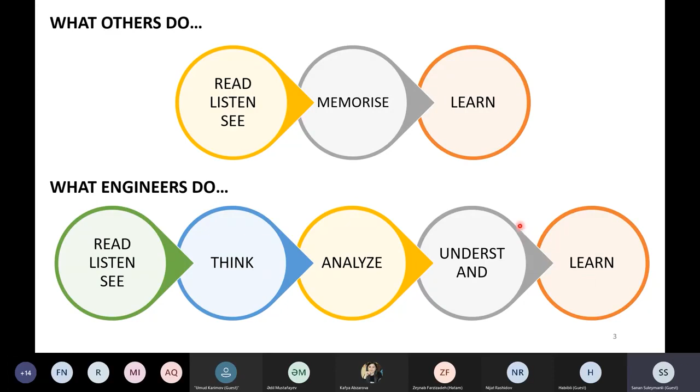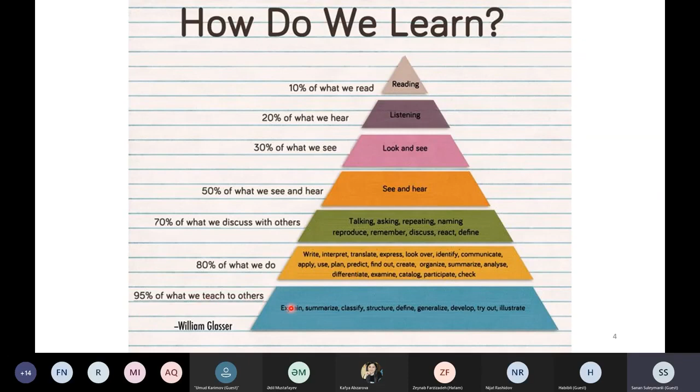How do we reproduce? We take notes during the classes, and then we read our notes again and again. That's one way. Another way can be doing the homework assignments, which we do at the universities. And the most effective way of reproducing is teaching. You share your knowledge, you teach others, and this way you learn more than the ones you teach. I will show you also a pyramid that shows how we learn, and at the end you can see that we learn 95% of what we teach to others. If you share your knowledge, you learn more and more.

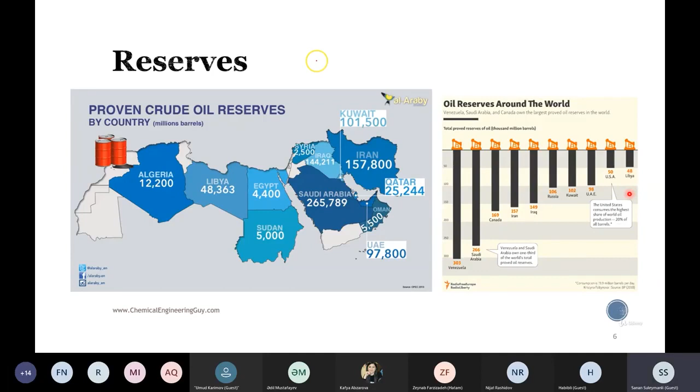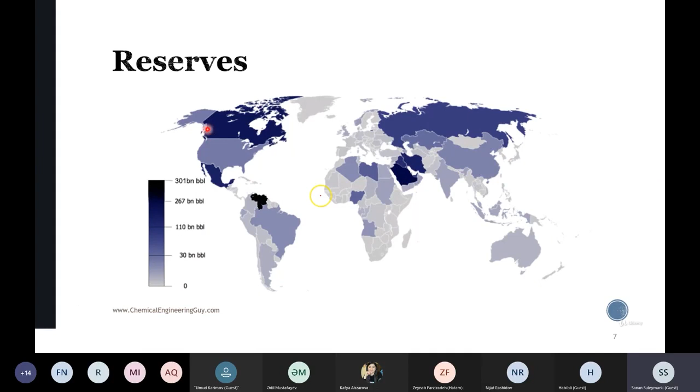Oil reserves. Why do we have oil refineries? Because we have a lot of oil reserves. Here you can see that the most oil reserves can be found in Venezuela, Saudi Arabia, Canada, etc. If we have so many oil reserves, then we should also have many oil refineries. This shows the map view of the oil reserves. Again you can see the most oil reserves are in Venezuela, Saudi Arabia, Iran, Canada, etc.

This is the statistics from the BP Statistical Review of World Energy 2018. Comparing the years 1997, 2007, and 2017, we can see a sharp increase in proved reserves, from 1,162,000 million barrels in 1997 to nearly 1,700,000 million barrels in 2017.

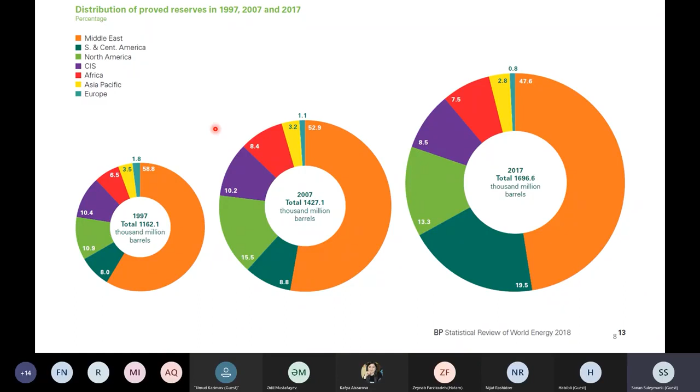Then what's crude oil? Crude oil is a multi-component mixture consisting of more than 108 compounds. In the next slide we will see that crude oil is mainly composed of hydrocarbons and also other impurities like water. That's why we have to refine oil, because we cannot use crude oil effectively without refining.

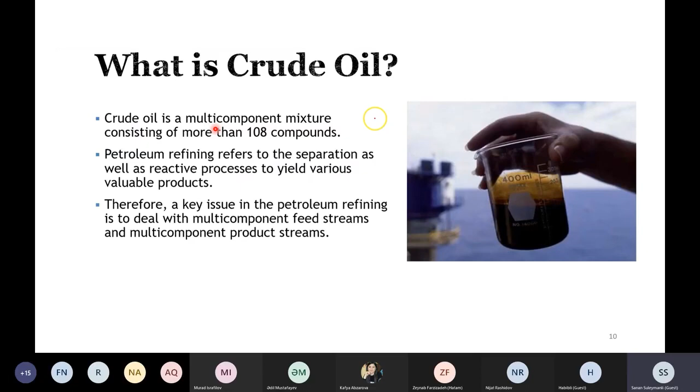You can ask, what is refining? Refining is just changing the shape or bringing the feedstock to useful products. It's not only oil that is refined - milk is also refined, and we produce different products. Nuts are refined too. So different feedstocks can be refined, but today we will talk about crude oil refining. Petroleum refining refers to the separation as well as the reactive processes to yield various valuable products.

Before starting the refining, we can classify our oil. Here you can see we have light sweet to heavy sour oil. What is light? Light means low density oil. API is from 35 to 60. You can find the specific gravity using this formula, which means that once API increases, specific gravity decreases. So higher API means lower density of crude oil, that's why it is considered light oil.

For your information, the API of the crude oil we are refining right now at Heydar Aliyev Oil Refinery is around 30. 30 API means we have medium density, and that corresponds to around 0.875 specific gravity. What about sweet and sour?

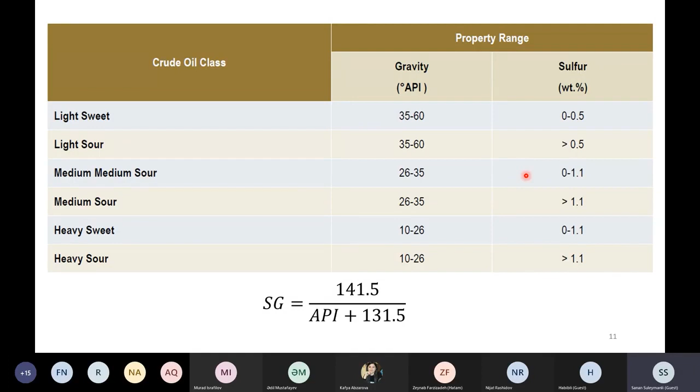Sweet and sour represent the sulfur content of crude oil. From 0 to 0.5 weight% sulfur, it is sweet. If you have more than 0.5 weight% sulfur in the crude oil, that is sour. Okay, what does it tell us? Why do we need to classify our oil as light and sweet?

Before answering the question, we can check the composition of crude oil. From 1 barrel, which is around 159 liters of crude oil, we can produce around 46% gasoline, 9% jet fuel, also called kerosene, and 26% diesel and other fuel. Of course, these numbers are not exact - they can be different for different types of crude oil, and also depend on what we want to produce more of.

If we want to produce less gasoline, then we design our process in such a way that this number will be lower but diesel will be higher, for instance. In fact, you can see that the light fuels, or useful fuels, are around 80% of crude oil. That is where the refiners earn the most money, that's why refiners try to produce as much gasoline, jet fuel, and diesel as possible in order to make money.

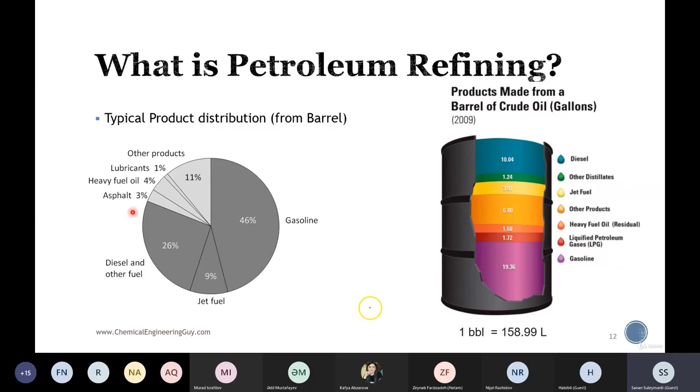Other products - lubricants, heavy fuel oil, asphalt, bitumen - are considered heavy products, which in fact have low contribution to profit.

This is the typical petroleum refining scheme. You can see that here we have crude oil and it enters the heater. After that, we have the distillation column and we produce the different products. Now, I will, so

What we said is that there are around 108 components in the crude oil, and the carbon number can start from C1 to C70 plus. That's why it's a mixture of really light components till heavy components. We have to separate it. We separate it, but our products are not pure substances either. Our products are also mixtures, but in a certain range.

So we have C1 and C2, which we call dry gas. We have C3 and C4, which we call LPG. So from C1 to C4, we have the gases. And then starting from C5, we have the liquid products. We have C5 to C10, it is naphtha. You can also call it the gasoline. Here we can see the light naphtha and heavy naphtha.

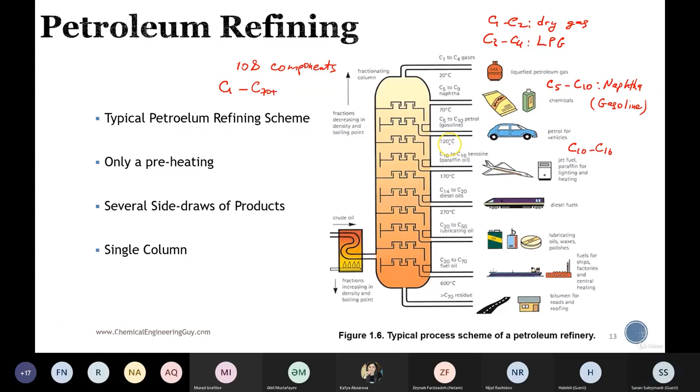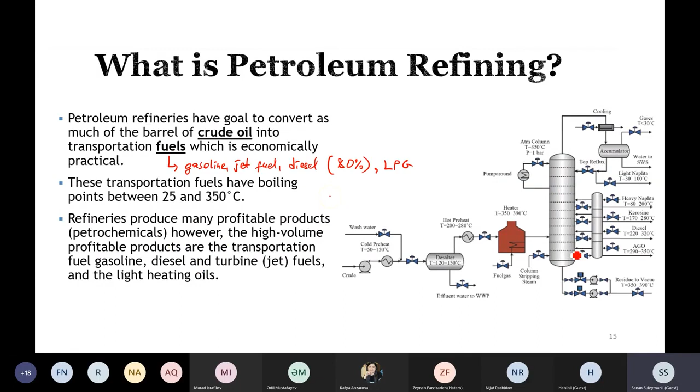We will talk about the boiling points of the products later. And as I said before, refiners produce many profitable products. The high volume profitable products are the transportation fuels. This is the crude distillation unit, which we will talk about later. And also,

if you remember, I asked the question why we should classify the crude types. So what we said, we had sweet and sour. We had light and heavy. This is what we learned about the crude types. So if you have a sweet and light crude, then we need a less complex refinery to refine this crude. However, if you have heavier and sour crude, it means that we need more complex.

Why? Because if it is sour, you have to clean that. To clean more sulfur, we need higher design capacities or more complex equipment, higher pressure, higher temperature, etc. So if we have the lighter crude, it means that we have more transportation fuels in the crude oil. But if you have heavier, then it means that we have less.

What we want to do is crack the heavier part of this crude into the lighter hydrocarbons, which are considered transportation fuels. And cracking units are more complex. And here what I explained is written. However, in the future, what we can expect is that we will run out of light crude as time passes, and we have to use heavier crude in 20, 30, or 40 years.

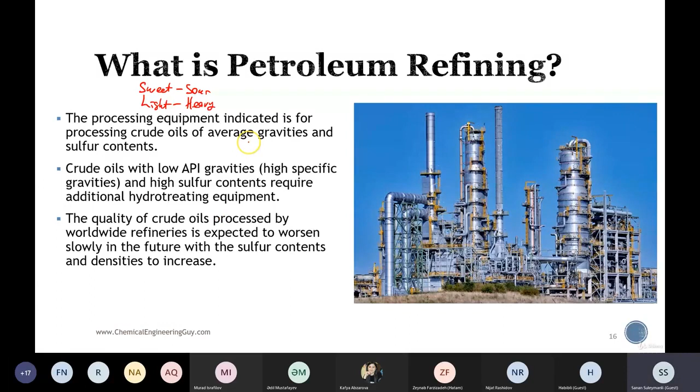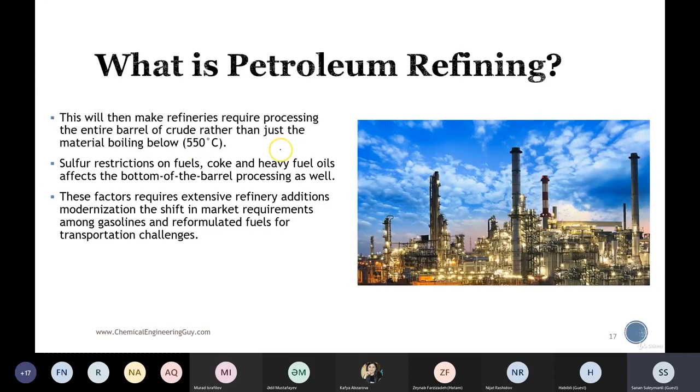In this case, this will make the refiners require processing the entire barrel of crude rather than just the material boiling below. So you will use higher temperatures, higher pressures, and it will cost more to refine the heavy crude.

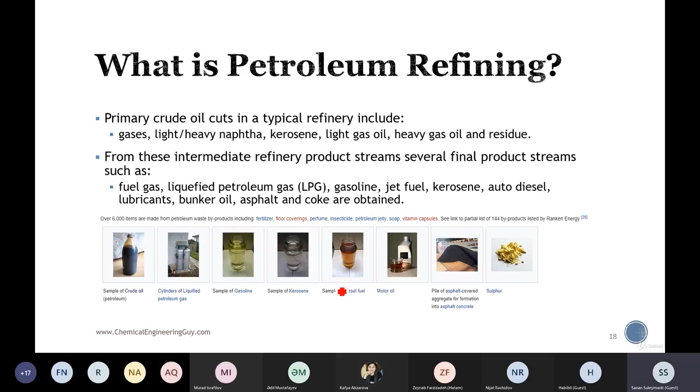These are the examples of the petroleum products, which we saw in the previous one. We have the gases, naphtha, kerosene, light gas oil, heavy gas oil. This is the diesel and residue. And you can find the photos of the different products. So gasoline, this is transparent. You have the kerosene, it's also transparent. The diesel fuel, you have the yellowish color, and as it becomes heavier, the color also becomes darker.

These are the different types of products which are obtained from crude, because the light fuels such as C3, C4, and light naphtha can be sent to the petrochemical complex. Here in Azerbaijan, we send the light naphtha to Azerkimya. In Azerkimya, they produce ethylene, and then they send ethylene to SOCAR Polymer. SOCAR Polymer produces the polypropylene, and from propylene, we can have, let's say, the bottle or other products.

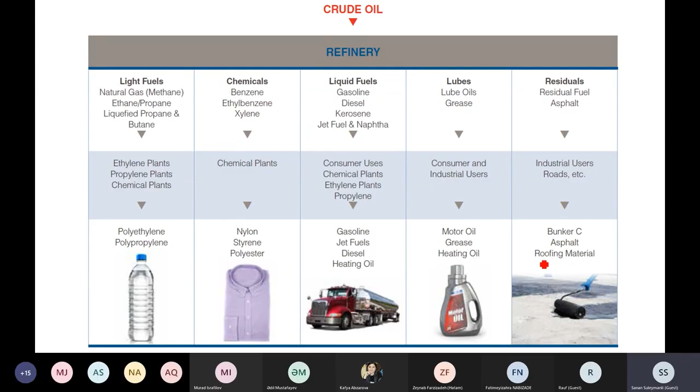So from chemicals, which are also produced from crude oil, we can have nylon, styrene, polyester. We have the liquid fuels, lubes, residuals. Residuals can be used for bunker C, asphalt, roofing material. So as you can see, there is no loss in crude. We use the lightest components from C1 to C2 as fuel gas, to the heaviest component as asphalt or roofing material. The process overview.

So as you can see, crude oil and gas is extracted from the well, and then of course it has a primary and secondary separation before it is sent to the refinery. Once it is sent to the refinery, it is desalted. We also have desalters in our refinery, and the refinery is our main scope. Today, we will talk about the processes there.

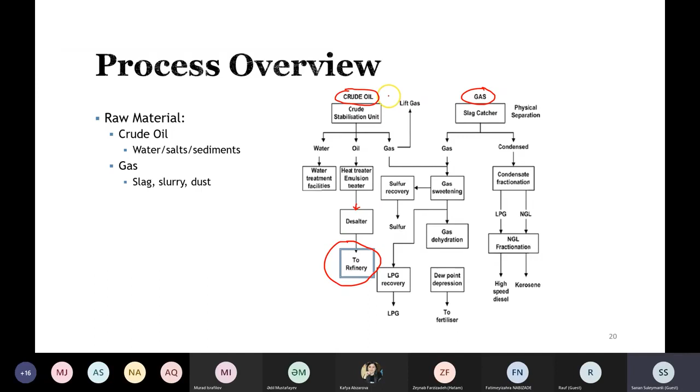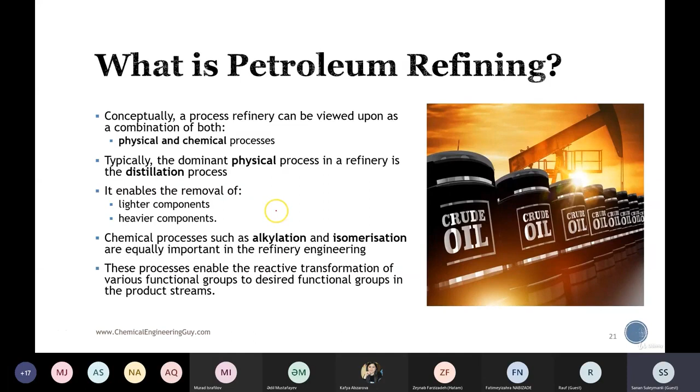And what is petroleum refining? In the refinery, there are both physical processes and chemical processes. The physical processes can be distillation, atmospheric distillation, vacuum distillation as a process unit. But of course, we have different types of separation or adsorption in each unit as a single unit operation. We have alkylation, isomerization, cracking, reforming. These can be the examples for the chemical processes.

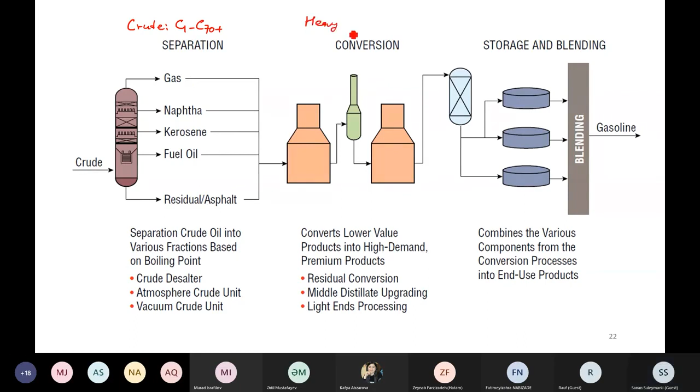We can separate the refinery processes into three parts. The first part is separation. Why separation? Because crude is a mixture of C1 to C70 plus, and we have to separate it first. Once we separate, we want to convert heavy products to light products. Why do we convert heavy products to light products? Because light products are transportation fuels, which help to make higher profit.

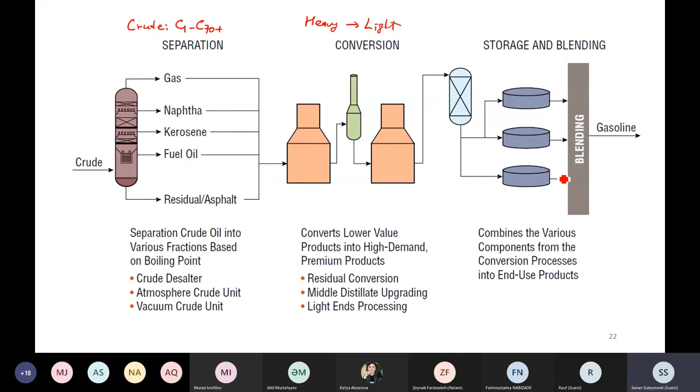And then, after all, we have the storage and blending. We blend the different streams as I showed in the block flow diagram for gasoline, and also we have some additives to diesel, jet fuel, etc. Is that all? No. Why? Because we also have treating. What is treating? Treating you can think of as cleaning. Cleaning from sulfur content, nitrogen content, also some oxygen, etc. Why? Because we have some standards, we have product specs for the transportation fuels and also other products.

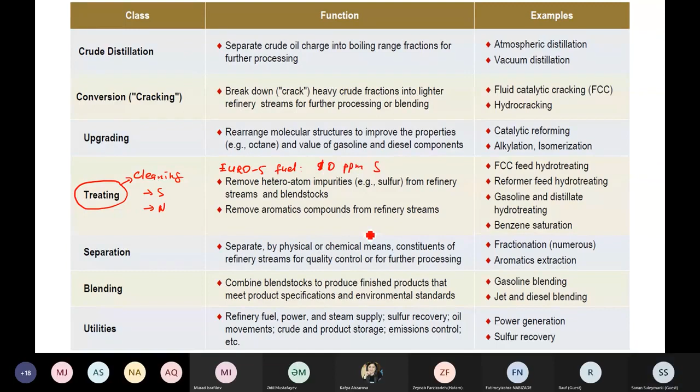For instance, if you want to produce the Euro 5 fuel, you have the 10 ppm sulfur limitation. So what was the sulfur content of crude oil? We said for sweet, it is 0.5 weight percent, which means that it is 5,000 ppm S content in the crude oil, but our final product, it can be diesel or gasoline, should have 10 ppm sulfur content. That's why we need to have the treating processes.

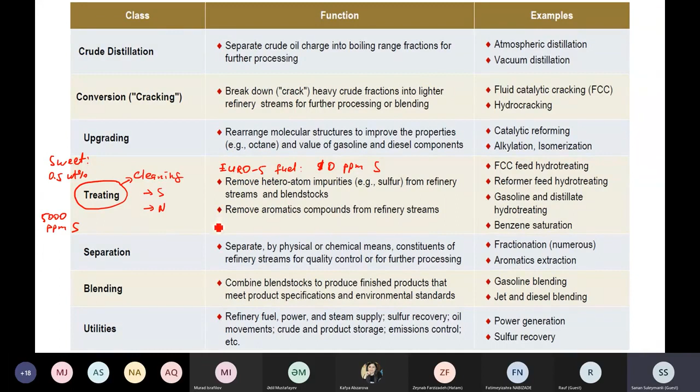And also the residues can poison the catalyst, because hydrotreating is a catalytic process. It can poison the catalyst in the short term. And it also has 5,000 ppm sulfur. All this makes having one single hydrotreater before the distillation unit impractical. That's why we first separate, then we have different processes for each type of product, as hydrotreaters. But whatever you have, you cannot sell your product without hydrotreating, with so high sulfur content.

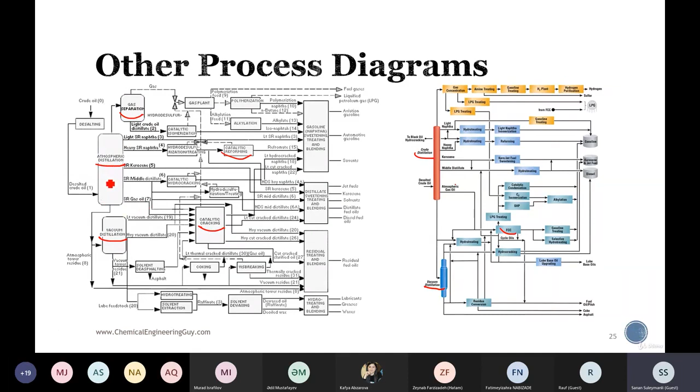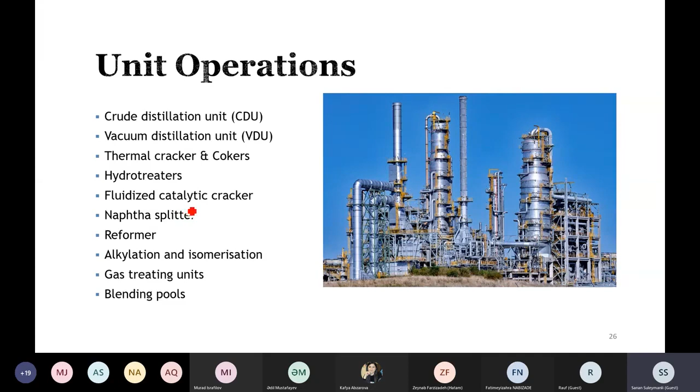Once again, what is a unit? Each single block is called a unit in the refinery. Unit operations. What you see in these block flow diagrams are these types of unit operations: the crude distillation unit, vacuum distillation unit, thermal crackers, where now delayed coker units are mostly used, hydrotreaters, catalytic cracking, naphtha splitter, etc. Now we are going to talk about these unit operations briefly.

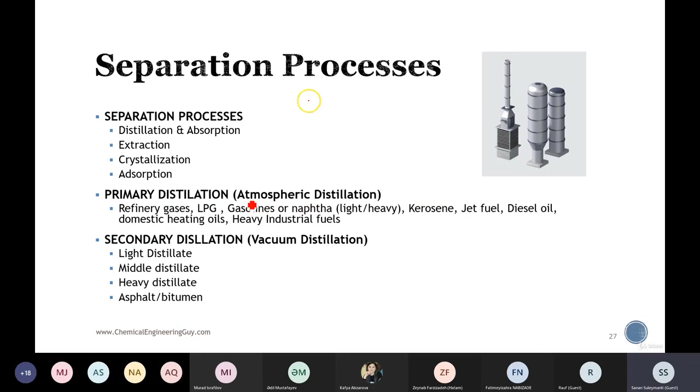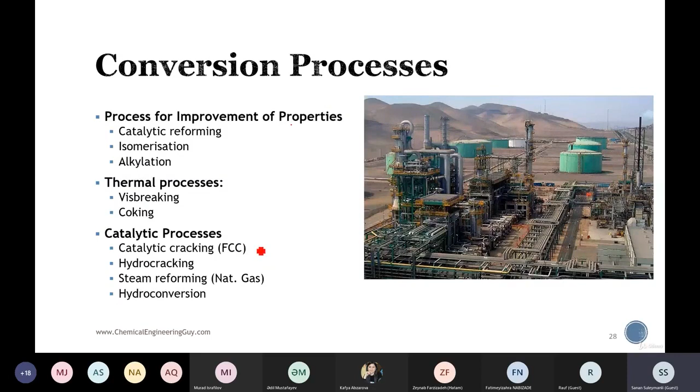Separation processes. As I said before, we can classify the processes in the refinery in a few steps. The first part is separation processes, which can be distillation, absorption, extraction, crystallization, adsorption. You can find these separation processes in each unit; each unit has a separate distillation column, a reboiler, etc. For primary distillation we use atmospheric distillation, because that is the first unit of the refinery, and we also have a secondary distillation, vacuum distillation. Conversion processes are catalytic reforming, isomerization, alkylation, hydrocracking, catalytic cracking, etc.

Sanan Bey, we have a question in the chat box. Rasul Amirov asks, what is a reformer? Thank you, Rasul, for your question. I will talk about the catalytic reforming process in future slides.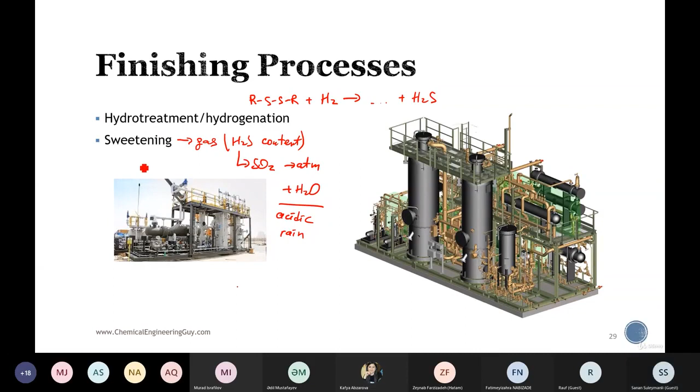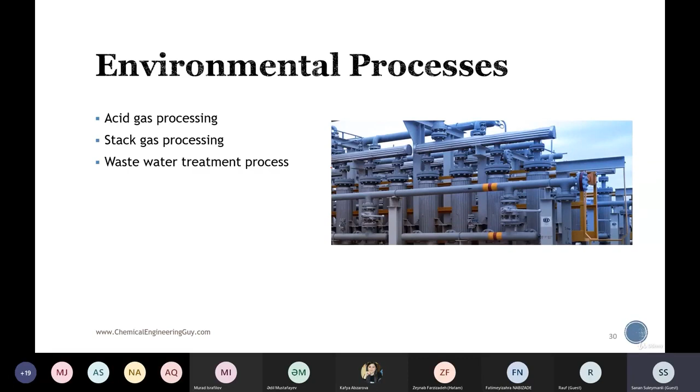We also have environmental processes, such as acid gas processing, stack gas processing, and wastewater treatment, which is being built right now at the Baku refinery. We will have a new wastewater treatment process, and those who watched the membrane technology lecture yesterday, the first lecture on membrane technology, Zehra Hanım talked about membrane applications in wastewater treatment processes.

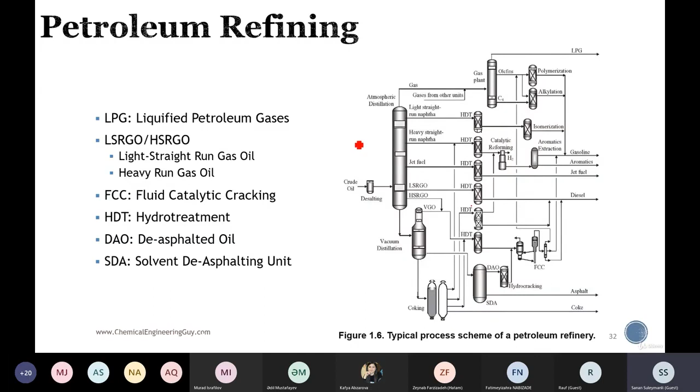Now, everything starts from atmospheric distillation. What is atmospheric distillation? This is also a different view of the block flow diagram. And what I mean that each unit has so many pieces of equipment is this one. For instance, the catalytic reforming unit. This is a really simplified PFD, but the real PFD has so many pieces of equipment, or the isomerization unit, alkylation unit. Each block is a different unit, each block has different processes.

Crude distillation unit. The crude coming to the refinery first goes into the desalters. In the desalters, we first add the wash water, I will write it down, we add the wash water, we add the demulsifier, and then we create emulsion, and then we separate all the water in the crude from crude oil. So you can see effluent water goes to the wastewater treatment plant, and then the crude oil which was separated from the water is first preheated and is sent to the heater, and at around 390 degrees it enters the

atmospheric distillation column. And in the atmospheric distillation column we separate the products which we saw in the block flow diagram: gases, light naphtha, heavy naphtha, kerosene, diesel, atmospheric gas oil. This can also be considered as diesel. You can think like that: light diesel, heavy diesel. And then we have the atmospheric residue to the vacuum distillation unit.

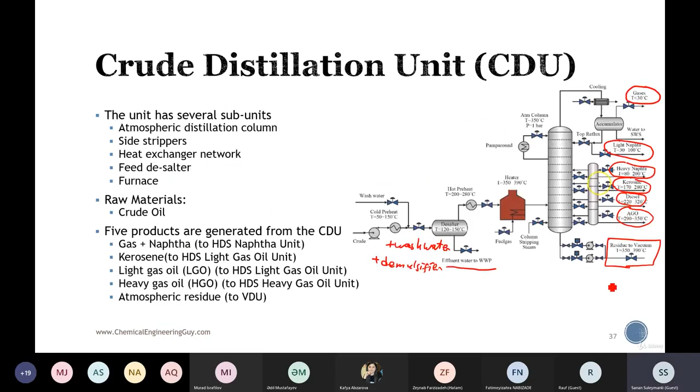And operating conditions: the temperature at the entrance of the furnace, where the crude enters, is around 200 to 280 degrees. And after the furnace, it is heated to 330 or 370 degrees. The pressure is around 1 barg, as it can be seen from its name, atmospheric distillation unit. This is a simplified process flow diagram of the crude distillation unit. It's the same atmospheric distillation or crude distillation unit. We have the same products again here, and this residue goes to the VDU, vacuum distillation unit.

What happens to these products? They are sent to the hydrotreater. And sour water, what does sour water mean? We have too high H2S content in the water. It can be sent to the sour water stripper. And in the sour water stripper, H2S and water are separated. Water is sent to the wastewater treatment plant, where we treat the water, and the water is sent to the Caspian Sea. And H2S is sent to the sulfur production unit. So we produce sulfur from H2S.

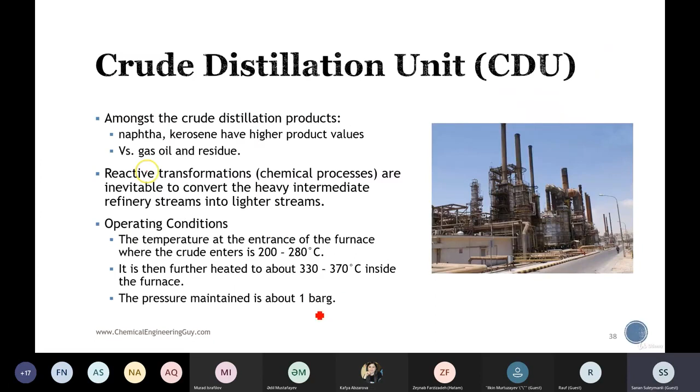Okay, I will answer. So you are probably familiar with absolute pressure. Yes. And gauge pressure. P absolute is P gauge plus P atmospheric. So if you have G here, it means that it is 1 barg. It is gauge pressure, 1 barg inside, which is equal to 2 atm or 2 bar absolute pressure. So they are the same number.

This is the reason. And here I can see that Ilkin asked whether this water means that we have water in the feed. Yes, we have water in the feed. We have desalters. We try to separate the water as much as possible, but we also have water left in the feed. And also from the hydrogenation processes, if there is oxygen, not oxygen gas, oxygen as an element, it can react with H2 and we produce more H2O.

There was another question. How many bars are in 1 barg? So 1 barg is 1 bar plus 1 atm. This gives you 2 bar absolute. And 1 atm can be taken as 1 bar. If you want to be exact, 1 atm is 1.013 bar. Why? Because 1 bar is 10 to the power 5 Pascal. 1 atm is 101,325 Pascal.

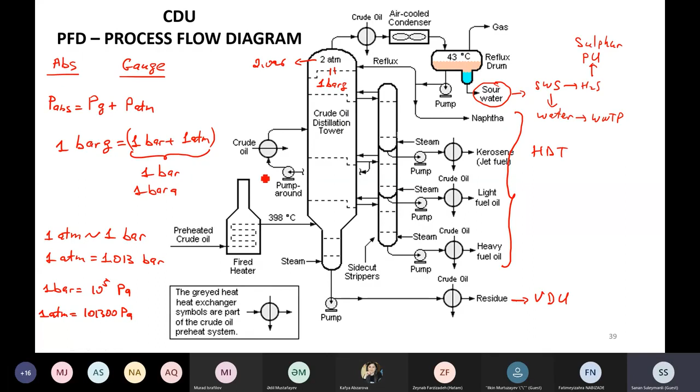This is about the pressure side section of our session. And then, as we said, we have the residue. Residue is sent to the vacuum distillation unit. And in the vacuum distillation unit, the pressure is from 25 to 40 millimeter Hg. What does it mean? 1 bar G is 760 millimeter Hg.

So if you want to find this one, let's say the 40 mmHg, you will have around 0.05 bar G. And then I want to ask you: why a vacuum distillation unit? Why do we have the vacuum condition to separate the light products from heavier ones?

Hi, I can answer this question. Yes, please. Because if we separate in the previous one, in this case we would need a higher temperature, approximately over 500. But in the vacuum distillation, we have here an ejector, and we create the vacuum phase. In this case, we decrease it and we can separate at approximately 400 temperature.

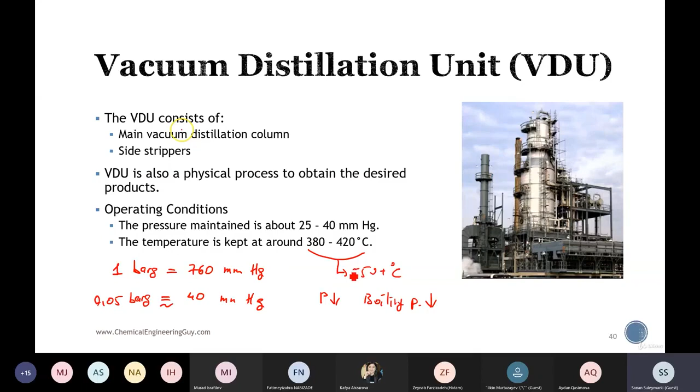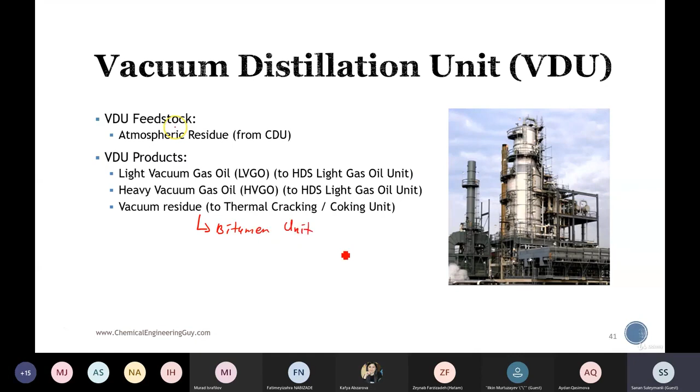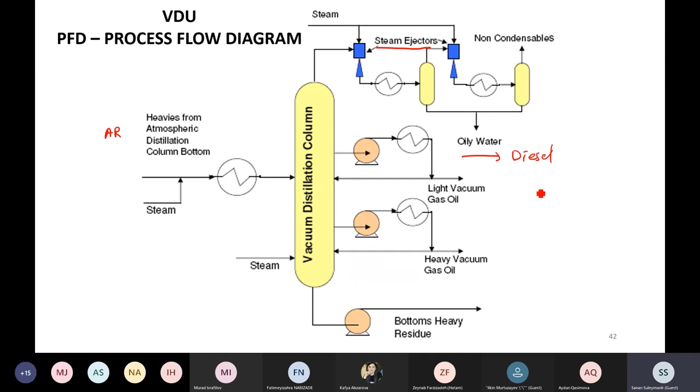Okay, we talked about the atmospheric distillation unit. We said that the atmospheric residue went to the vacuum distillation unit. We have the vacuum residue. Vacuum residue goes to delayed coking. Vacuum residue goes to the bitumen unit. Here we produce asphalt. We will produce coke; I will talk about it later. We have the light vacuum gas oil, the heavy vacuum gas oil, and then atmospheric gas oil, which is sent to the FCC hydrotreater, and then FCC.

And the rest, as you can see: diesel oil is sent to the diesel hydrotreater and then it is sent to product storage, and after adding some additives, it is sold. And also jet fuel: here we don't use the hydrotreater, but we use caustic and amine to clean the sulfur content of the jet fuel, that's why it is called the Merox treater. And then after the jet fuel is cleaned, it is also sent for sales.

We will talk about the light naphtha and heavy naphtha now. First of all, gas treating units. As you can see, we have gases. When we say gas, we talk about C1 to C4. And other gases all come to the gas processing unit. In the gas processing unit, what we want to do is to split the products. We want to split into C1 and C2, C3, C4.

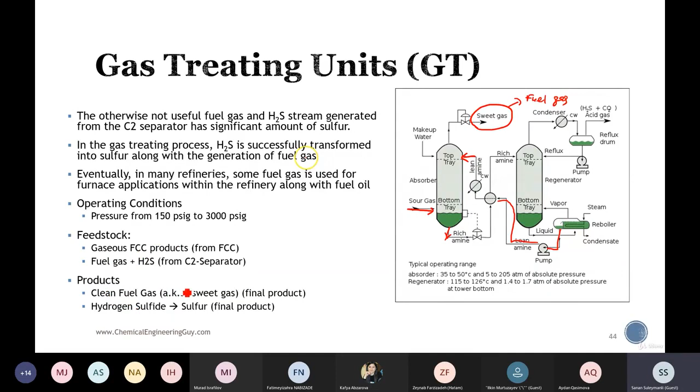Let's go back. Hydrogen sulfide from the sour water stripper goes to the sulfur plant. With Claus technology, we can produce sulfur. Sulfur can be solid or liquid. What will happen to the sulfur? We can produce it in a different plant, sulfuric acid for instance, but in our refinery we will just sell it to consumers.

So now we are done with gas. We are done with diesel, atmospheric gas oil, atmospheric residue, and jet fuel. We have left the light naphtha and heavy naphtha.

Hydrotreaters, as I told you before, the sulfur content in the crude is significantly high. What is it? less than 0.5% for sweet, and if it is bigger than 0.5%, that is sour.

Products from the CDU and VDU consist of a significant amount of sulfur, and sulfur removal is accomplished to remove the sulfur as H2S using hydrogen. So HDS, hydrotreating or hydrodesulfurization, can be used, but it is not only hydrodesulfurization, it is also HDN, hydrodenitrogenation, because not only is the sulfur content removed, but also the nitrogen content is removed. So HDS removes sulfur content as H2S, and nitrogen content is removed as NH3.

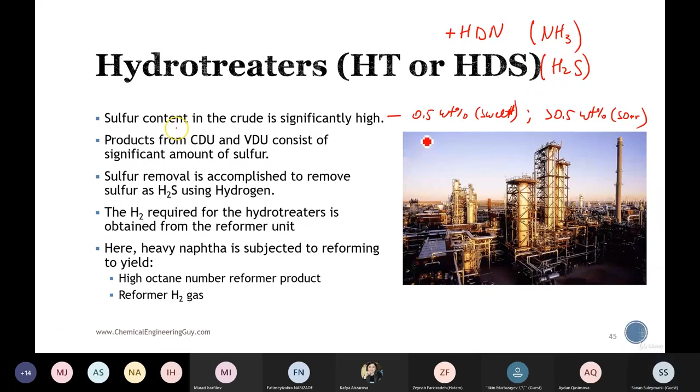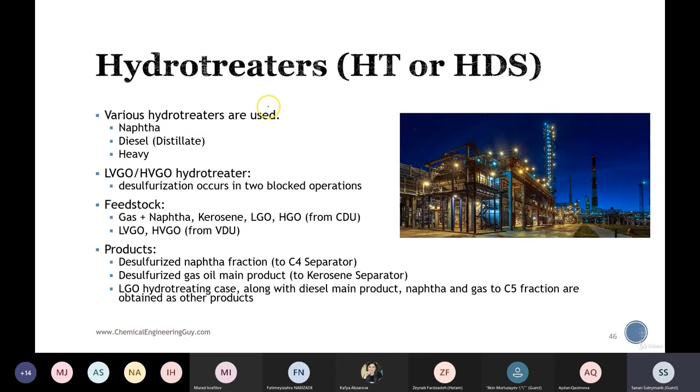How? With the reaction of hydrogen. So various hydrotreaters are used. We already talked about this one. You can use hydrotreaters for feedstock of different units or for products of different units.

Also for the kerosene hydrotreater, as I said, now mostly the caustic Merox unit is used to treat the kerosene, which means that we don't use hydrogen. Instead, we use the caustic and amine solution to treat the kerosene.

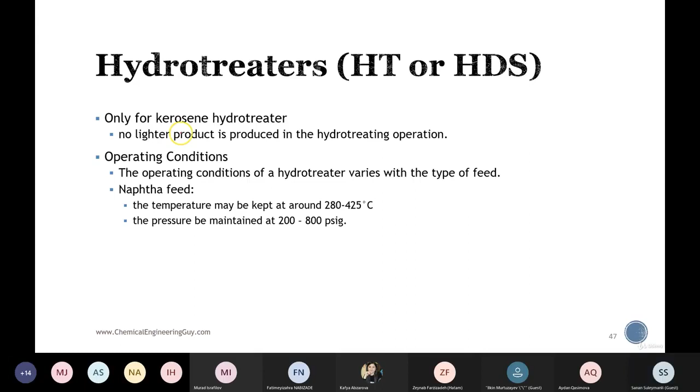This is the typical process for hydrotreating. As you can see, we have the recycled gas compressor. We compress the H2 to around 40 to 50 bar G, and we have the feed here. It is mixed, first preheated, then after the fired heater, it is heated to 300 to 400 degrees Celsius, and then in the fixed bed reactor we have the hydrogenation, hydrodesulfurization, and hydrodenitrogenation reactions.

As you know, hydrogenation reactions, let's say hydrocarbon plus H2, are combination reactions, which means they are exothermic. That means we have to control the temperature really carefully in our reactors. And always, H2 is given much more than needed, for instance 3 times or 4 times the needed amount.

Later on, in the gas separator, H2 is separated and sent back to the recycled gas compressor. Of course, the used hydrogen is made up, which comes from the hydrogen production unit or reforming. We will talk about reforming, but just remember that the hydrogen comes from the reformer unit, or HPU, hydrogen production unit.

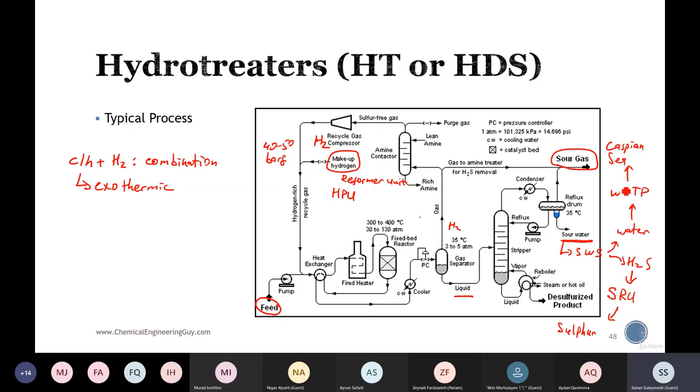So again, going back to yesterday's lecture, if you also have reverse osmosis in the wastewater treatment plant, you can also use that water as drinkable water.

So we are only left with naphtha, light naphtha and heavy naphtha. Naphtha you can also think of as gasoline. Naphtha splitter: why do we have a naphtha splitter? Because here we have light naphtha and heavy naphtha, but in some cases we have just one naphtha stream. If we have one naphtha stream, it is sent to the naphtha splitter. Here we separate the heavy naphtha from the light naphtha. Once we separate it, we can send the light naphtha to the isomerization unit, and we send the heavy naphtha to reforming. You can also think of it as CCR, continuous catalytic reforming.

Why do we do all of this? Because only producing naphtha or gasoline is not enough for us. We want the RON, octane number, as high as possible. But this light naphtha and heavy naphtha from the atmospheric distillation unit are around the 80s. That's why we use a naphtha splitter to split the light naphtha from the heavy naphtha. We send it to the isomerization unit. From the isomerization unit, the final product has around 87 RON, and from CCR you have a RON of 97.

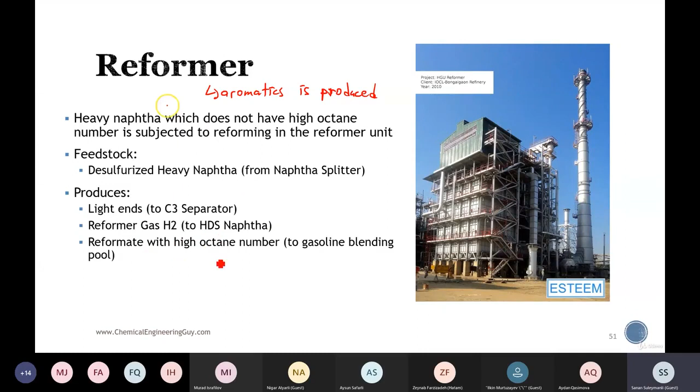Yes, please. A question in the chat box: what are the criteria for this choice? I think that is about this one. You choose by evaluating your catalyst. For instance, if you have a catalyst for the reforming process which is poisoned heavily by sulfur, you should have hydrotreating before reforming. You have the HDT, then the CCR, then the isom, because the catalysts in isomerization and catalytic reforming units are poisoned by sulfur. But as I said, you make the feasibility study, compare both options in terms of energy and other factors, and decide which one is better for you.

For instance, in our refinery, it is this one. First we have the hydrotreating unit, then the naphtha splitter, then light naphtha and heavy naphtha are sent to the isomerization unit or the catalytic reforming unit. For a different refinery, it can be a different case. Hope I could answer your question.

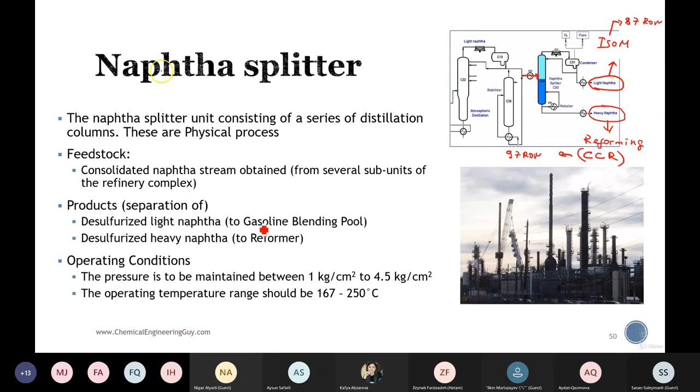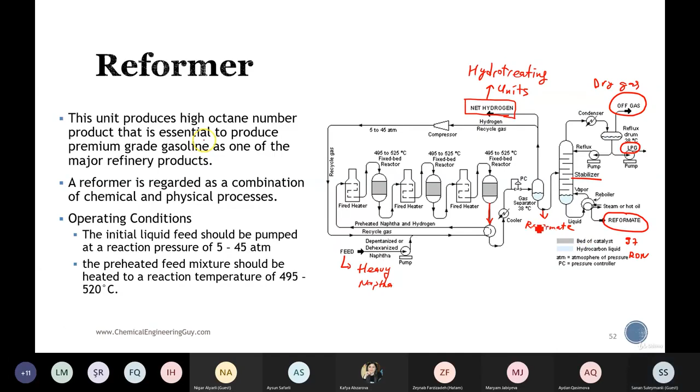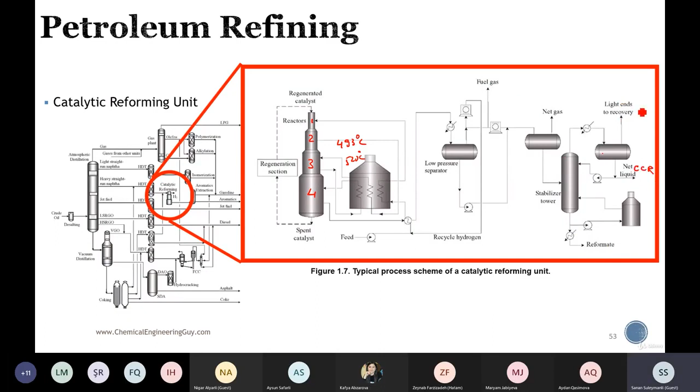Finally, we have the fluidized catalytic cracking. We'll go back here: we have atmospheric gas oil, light vacuum gas oil, and heavy vacuum gas oil. We separated them, but these are heavy products. What we want to do is send them to the fluid catalytic cracking unit to crack heavy products in order to have light products.

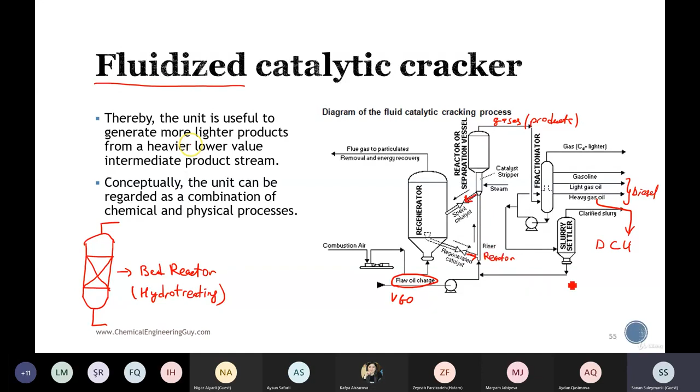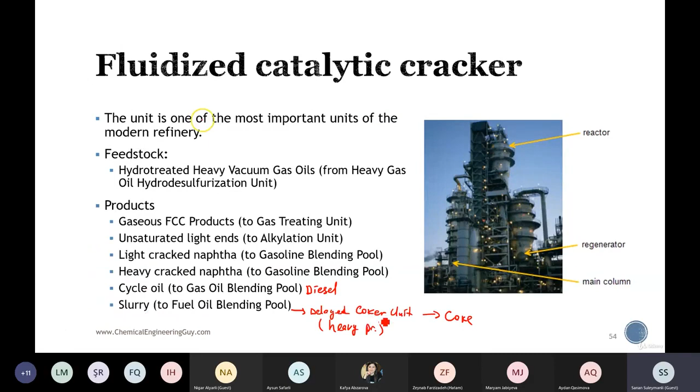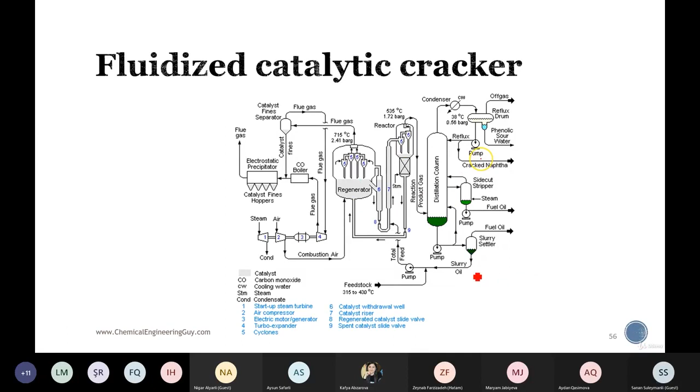This is another scheme of the fluidized catalytic cracking. As you can see, we have the regeneration, reaction, distillation column, and all different types of products. I just added different schemes to my presentation so that when I send it to you, you can check and compare the different schemes and find the similarities and differences between them.

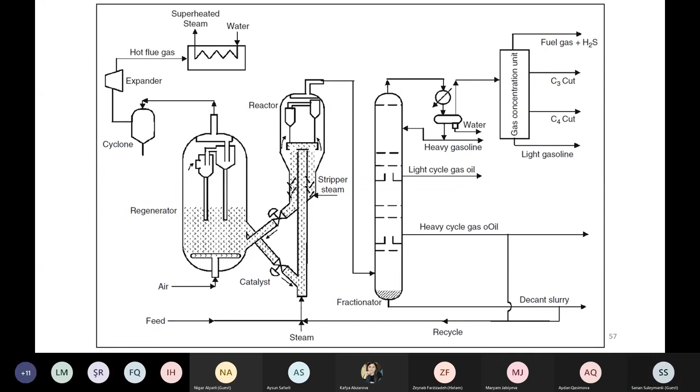But in modern refineries, we use the delayed coker unit to produce coke. Again, we have the naphtha as a result of the cracking. We have diesel, which are then sent to HT, hydrotreating process. But we have also coke, which is used in furnaces, such as the metallurgy furnaces. This coke is not loss, but it is cheap. It does not add much value on the refiner profit.

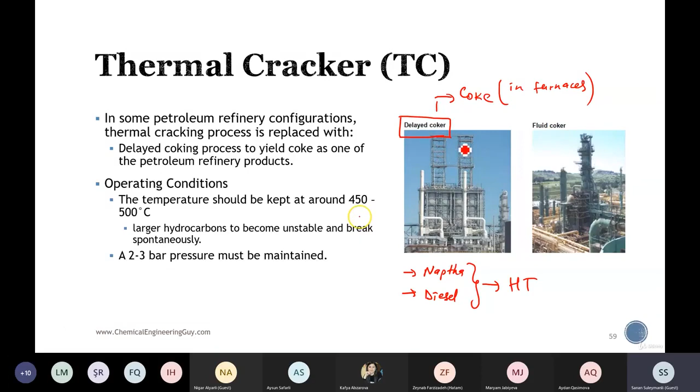However, the delayed coker unit is really important for the refinery. Why? Delayed coker unit means that I send my vacuum residue to my delayed coker unit. If I have a problem with the delayed coker unit, it means that I do not have much space for vacuum residue, and once the storages are full, I cannot do anything with my vacuum residue. That's why I have to stop the plant. So it is important. There is no loss here, and everything is going for sales.

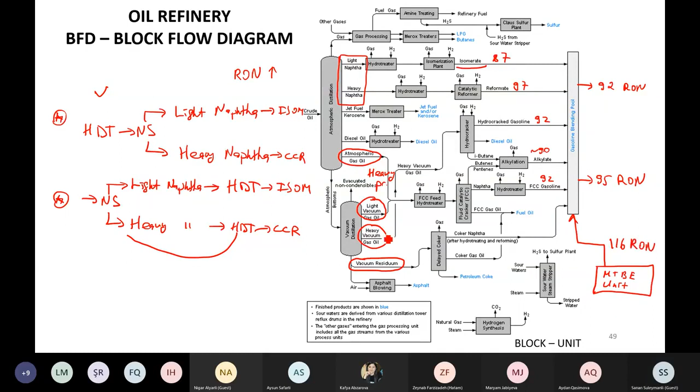Thermal crackers, and then finally we have the blending pools. In blending pools, we can blend the different streams of the gasoline in order to have the 92 or 95 gasoline with the required spec, or we can have some additives. For instance, we have additives to diesel fuel, we have additives to jet fuel to meet the product specification. Which product specifications should we consider? These are the ASTM temperatures, viscosities, octane numbers, flash point, pour point, and these are the product blending pools: LPG, gasoline, gas oil, fuel oil.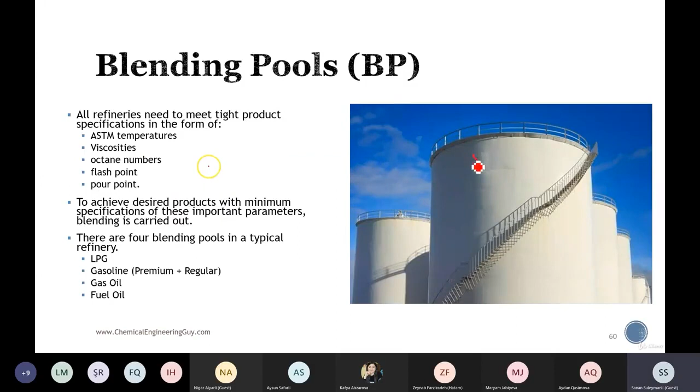Because C3 and C4 are gas at normal condition. But when it comes to LPG, it means liquefied petroleum gases. Now, to liquefy it, we need high pressure. And spherical storage can withstand high pressure. But here, the cylindrical storage can have around 5-6 bar G, up to 10, let's say, but this one can have 30-40 bar G, even higher if it is required.

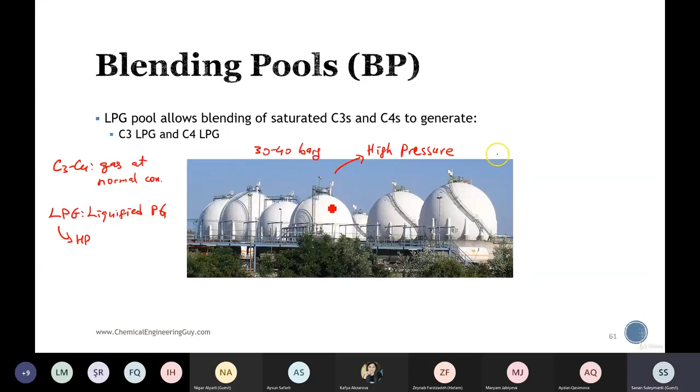Again, about the blending pools, the most important blending pool in the refinery complex is the gasoline pool. Why? Because we want to have the defined octane number for the gasoline we want to sell. The premium and regular gasoline products are prepared by blending appropriate amounts of n-butane, reformate, light naphtha, alkylate, light cracked naphtha. Or we can also add here MTBE.

And you can see that it is the (R+M)/2 method. What does it mean? If you want the octane number, it can be RON, research, or it can be MON, motor. And there is a delta of around 10. For instance, if you have 97 for RON, for MON you have 87. And it says that this number is the average of these two. So if it only wrote the research octane number, it would probably be around 92, I don't know, 94 or 95 and 98.

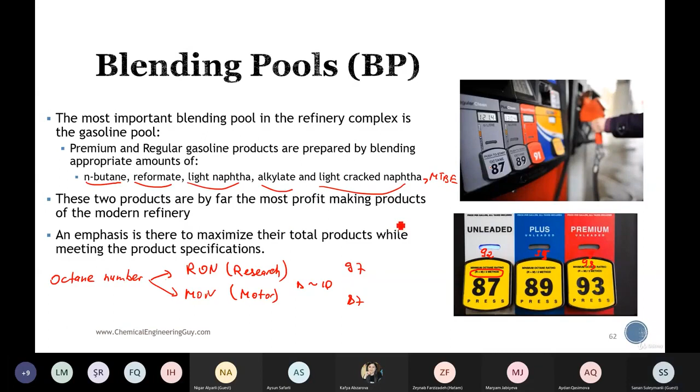These two products are by far the most profit-making products of the modern refinery. So this is, let's say, the supply chain of the crude oil and the products of the refinery. The crude oil comes to the gathering lines, crude storage tanks, and then from here it is sent to the pump station. We have transmission, and finally it is sent to the oil refinery. From the oil refinery we have the diesel storage, gasoline, and then they are sent to the marketing terminal, tanker trucks, and for service.

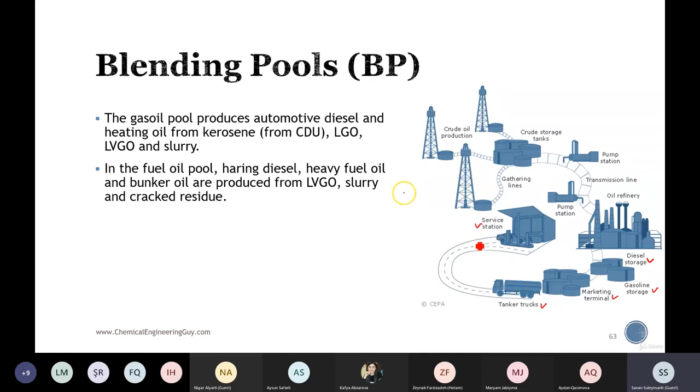This is the end of my presentation for today. We talked about the refinery processes in general, and also tried to summarize the processes of the main units at the refinery, such as the atmospheric distillation unit, the vacuum distillation unit, fluid catalytic cracking unit, continuous catalytic reforming unit. We also talked briefly about the delayed coking unit. And also, of course, we have the hydrotreating processes throughout the whole refinery.

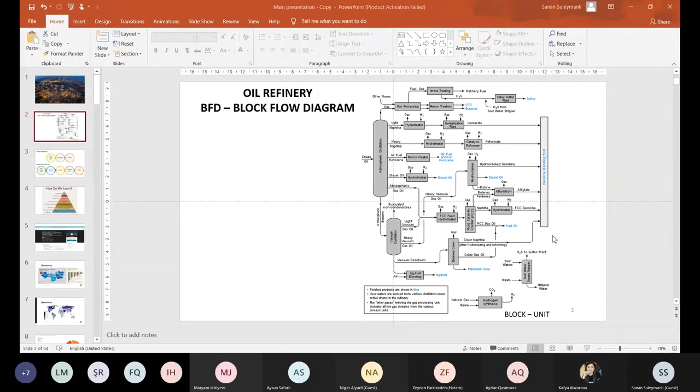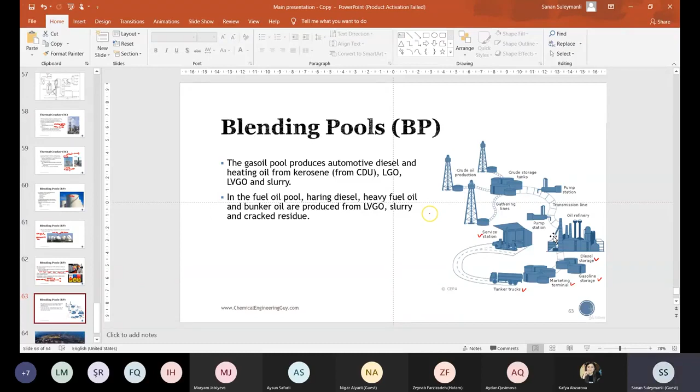Rasul Amirov says that he thinks the pressure is more evenly distributed. I think it's about the spherical tanks. Yes, and what were the cylinders in the last picture? You mean this one? Here the cylinders are storage tanks. Slide 64. Oh, these are also storage tanks here. All the cylinders are storage tanks.